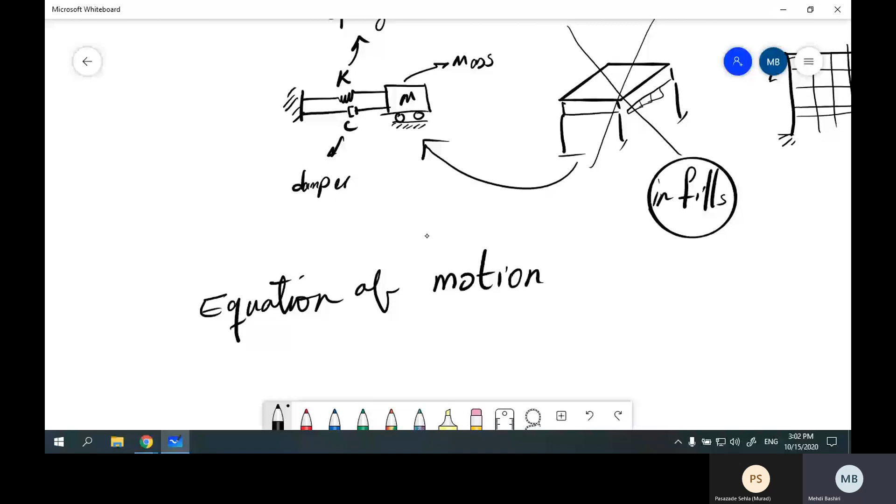For this system, M, if we have a force P in this way, for example, this is positive x, and this is negative x.

Okay, we have Fs. Sir, I don't know. Sir, you don't know? Your screen froze. I can't see anything. You can't see my screen? Yes.

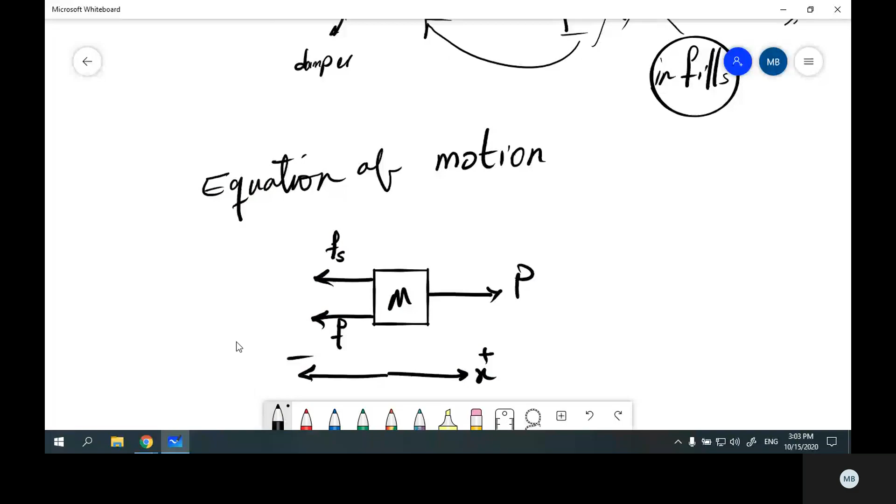Is it better now? Can you see the screen now? Okay.

So here we have three forces. One of them is P, one of them is Fs, the other one is for a damper, Fc or Fd.

If we want to find the response of the structure, what is the response? For example, you have a force here, earthquake force, and if I ask you to find the displacement of the structure after the earthquake, you have a displacement like this. If I ask you to find the response of the structure, you should find this displacement, or the velocity, or the acceleration. We categorize these items as the response of the structure.

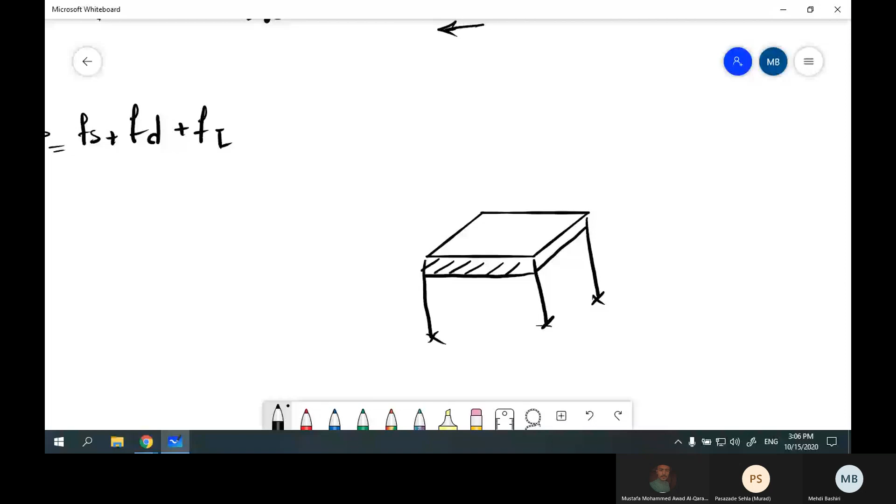This is the shaking of the ground because of the earthquake, and this is the weight, which we show with a lumped mass. So, because of the earthquake, this mass shakes, and the reason for this shaking is a force equal to m times Ag, the weight dot ground acceleration.

Because of this shaking, we have three things: one is displacement, one is velocity, and the other is acceleration. The force inside the damper triggers with velocity. This one, inertia, I think you know it from physics, triggers with acceleration, and this one triggers with displacement.

So if I push - assume that this is P - if I push this weight with a force P, this action has a couple of reactions, such as this one because of the stiffness, this one because of the damper, and one of them is Fi because of the inertia or the weight or the mass of M. And on the other side we have P.

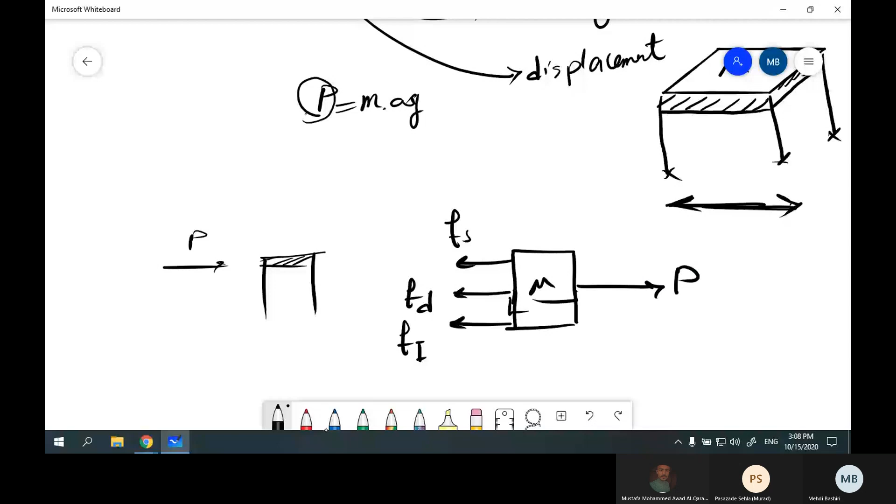So if we write the equation of motion, sigma Fx equals 0, we would have P on one side, and on this side Fs plus Fd plus Fi. What is Fs? Fs, as I talked about, is k dot x, like a spring.

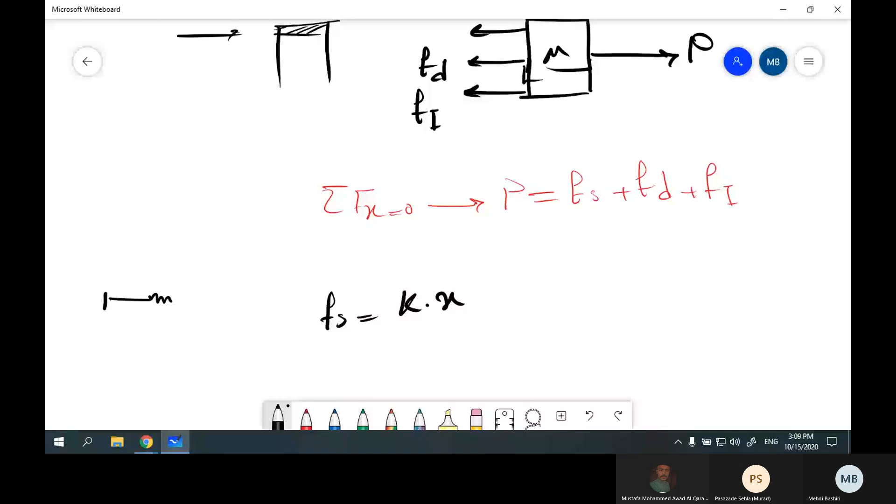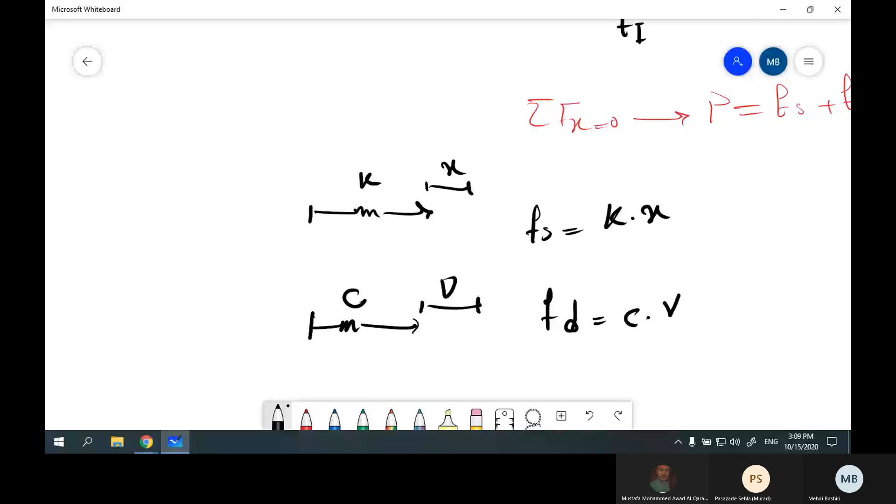The force inside the damper, with a coefficient of c, triggers with speed or velocity. Fd is equal to what? C dot v, or velocity. And because of the inertia, second law of Newton, Fi is equal to m dot a, acceleration.

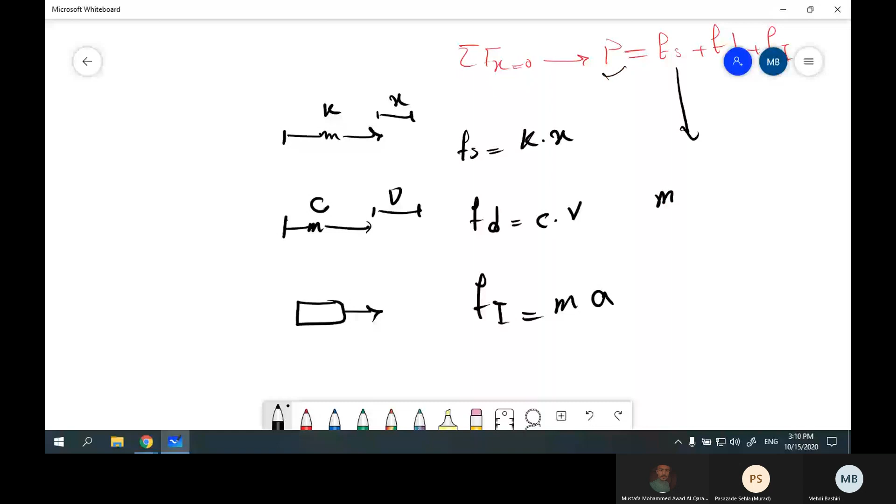So if I want to write this equation again, on one side we have m*a, on the other side we have Fs, which is K dot x plus C dot v plus m dot a. This is the coefficient of stiffness, this is the damping coefficient, and this one is the mass. So stiffness, damping, and mass.

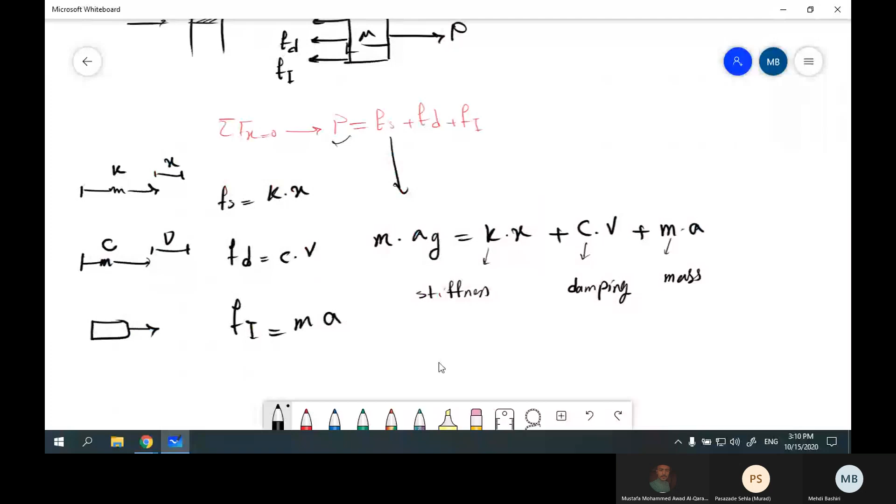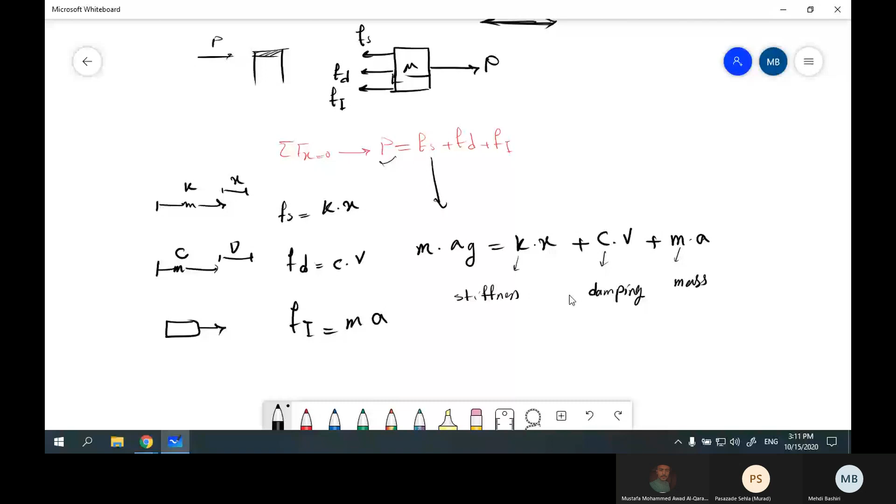I know this might be a little complicated because it's the first time that you hear this, but I just need you to know the general concept. I'm not going to give you examples of problems to solve using this. I just need you to know the general concept of equation of motion.

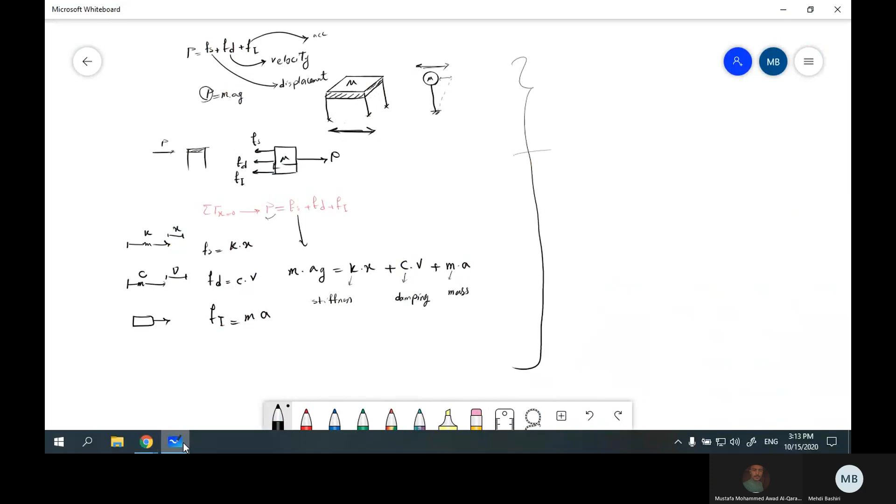Can you see it now? No. What now? No. Maybe you should leave and join again. Still low? Yes. Can you see or not? No, I can't see. Okay, leave and join again. Mustafa, can you see this screen? Yes sir, I can. Where are you? Your voice is very low. I said, where are you, in your country? I think I have a bad connection, that's why. Your voice is low. Where are you now? Now I can hear you. I am here, teacher. I said, in which country, your country? Yes, in my country. You're in Iraq? Yeah. What about you? I'm in my country. Charlotte, can you see it? Mustafa, mute your voice.

Can you see it now? Yes. Okay, as I said...

When we want to find the equation of motion, we have to use a free body diagram like this, and then by using... this is not zero, sorry. Sigma Fx is not zero here. I made a mistake. Sigma Fx is equal to p, not zero, because it's not static. And by using this equation, you can derive this one.

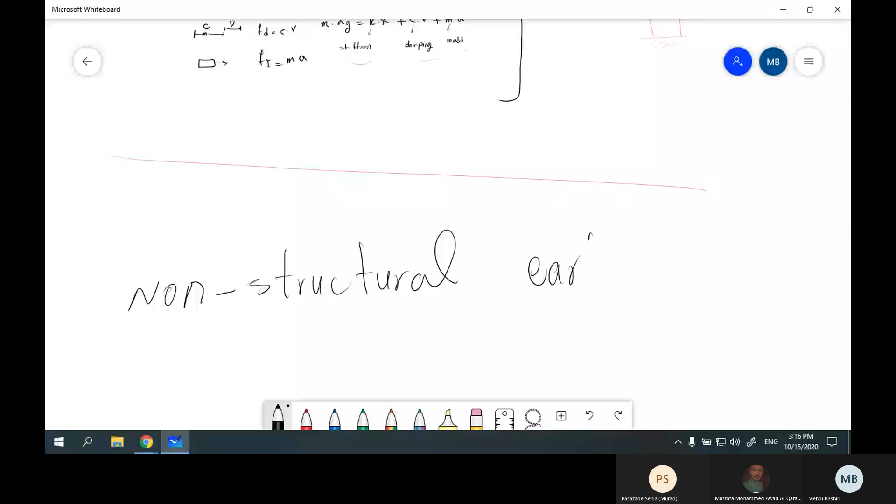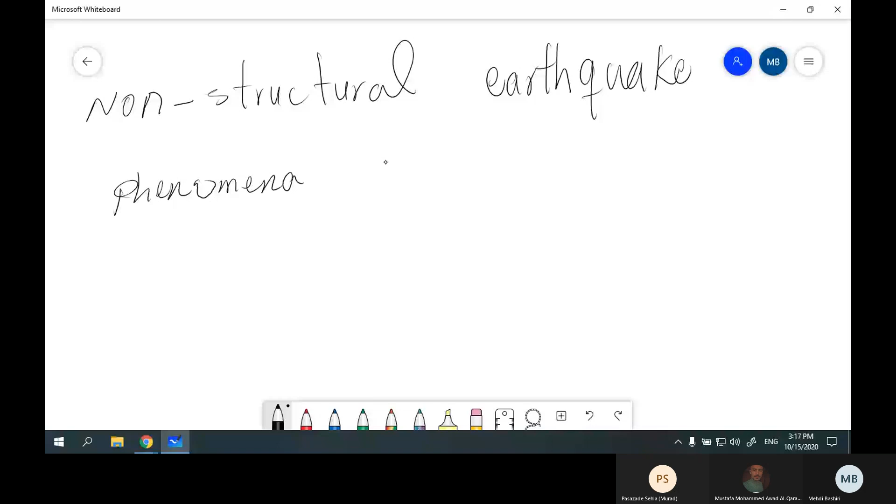One of the things about the earthquake is non-structural earthquake phenomena. What does it mean? If we have a structure like a building, when we investigate or evaluate this structure within the earthquake, we say that this is a structural investigation. For example, bridges, buildings, roads like this. But the ground, rivers, mountains, they are non-structural elements.

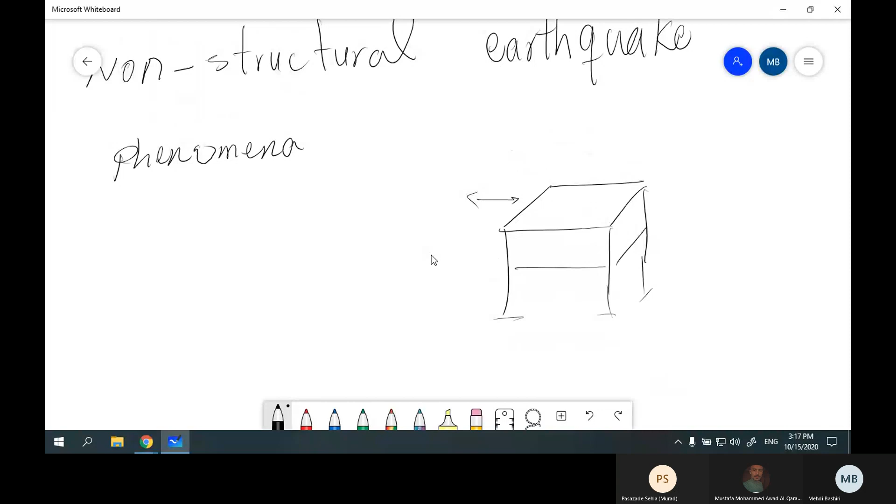So buildings and bridges, everything that we build, are structural elements. But such as rivers, or for example mountains - if you have a mountain here and we investigate this mountain after the earthquake, we say non-structural investigation. For example, after earthquakes we may have rocks falling because of the shaking, a couple of rocks fall down the mountain.

Or for example, because of the earthquake, the water inside the ground gets out, because of the pressures. So these are non-structural earthquake phenomena. In this chapter, we're going to talk about these non-structural phenomena. The first one is landslide.

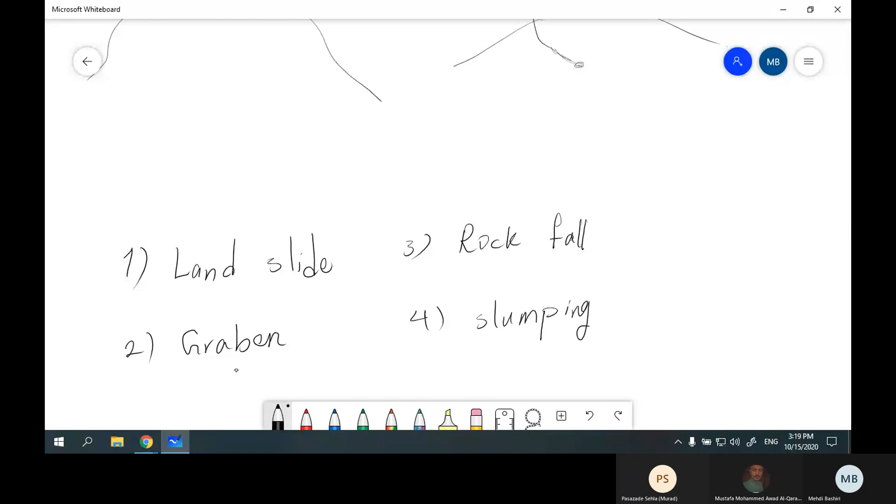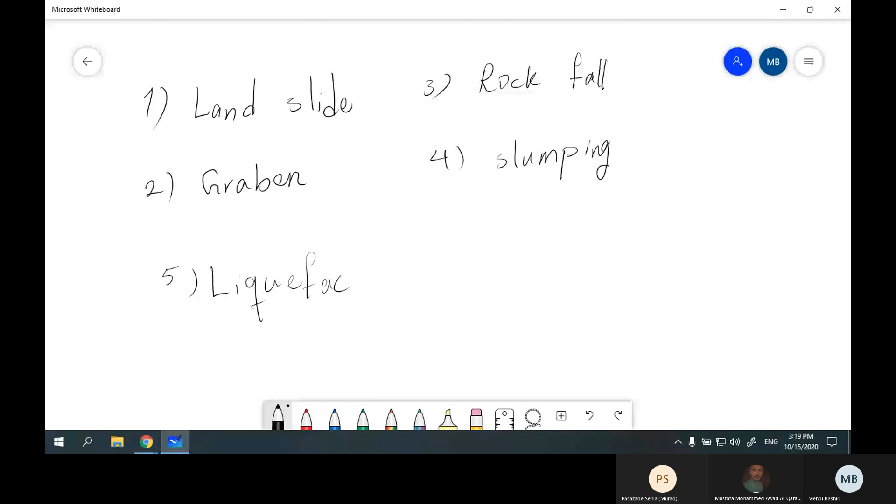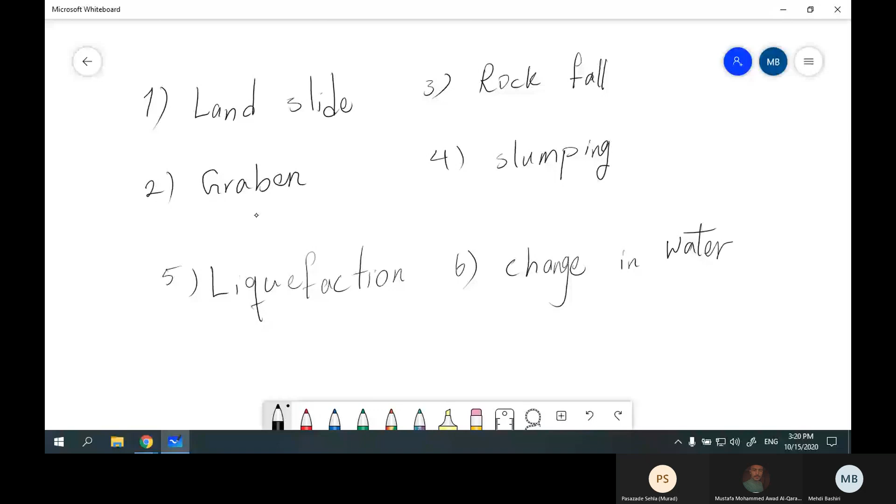The second one is graben. The third one is rockfall. Fourth one, slumping. Fifth one, liquefaction. Sixth one, change in water table. Seventh one, tsunami.

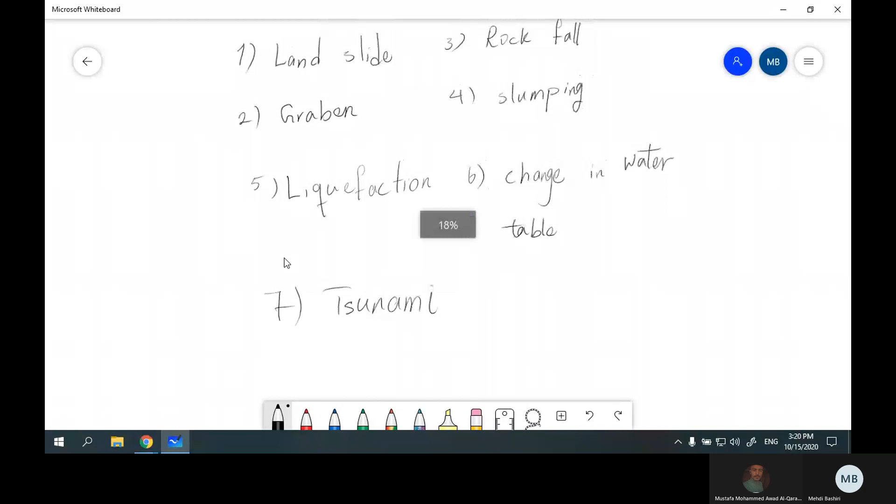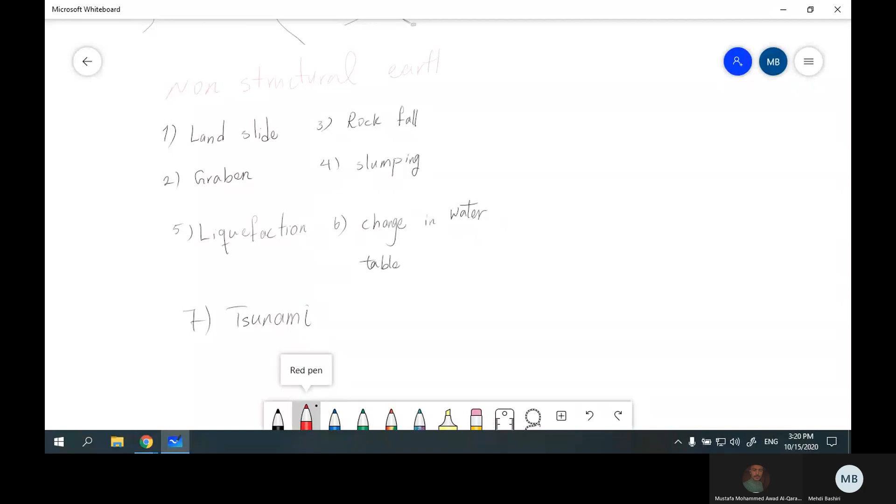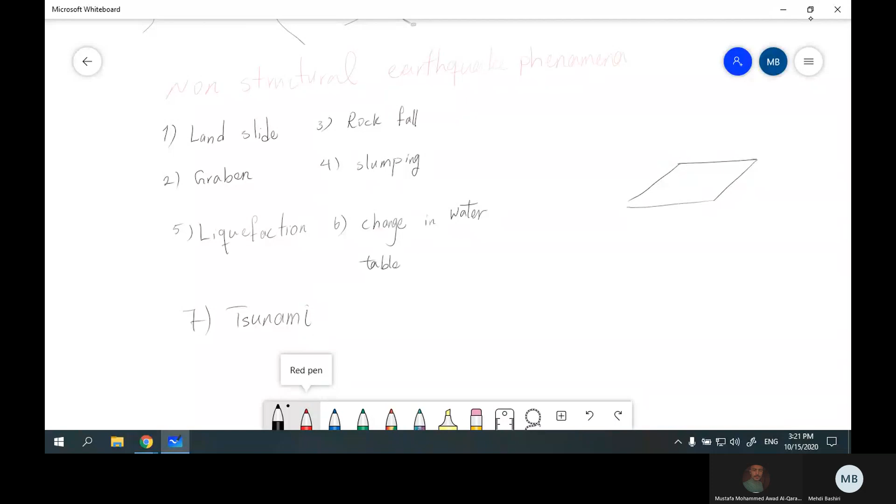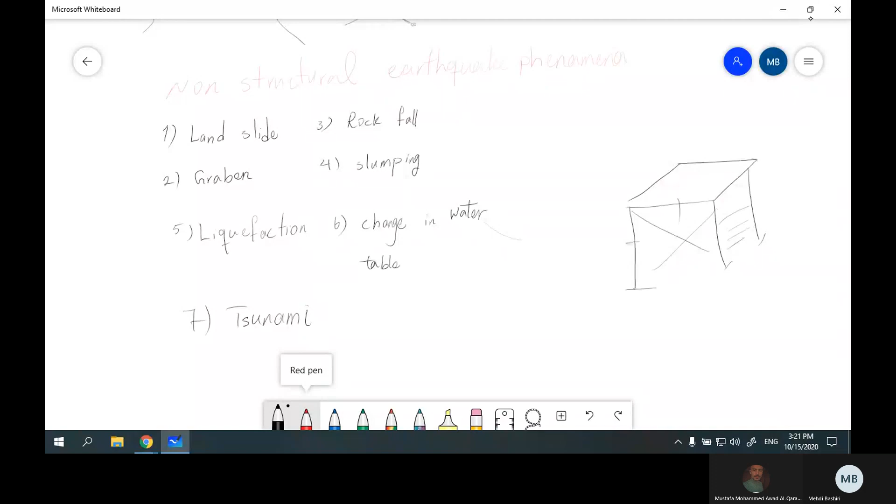Okay, so what are they again? They are non-structural earthquake phenomena. As I said, after the earthquake we may have a collapse or a failure in one of the columns, or in one of the beams, or in braces, or in walls - all of them are structural. But if we talk about the rivers, mountains, water tables, seas, oceans - all of them are non-structural.

Now I'm going to explain each of these phenomena. The first one is landslide.

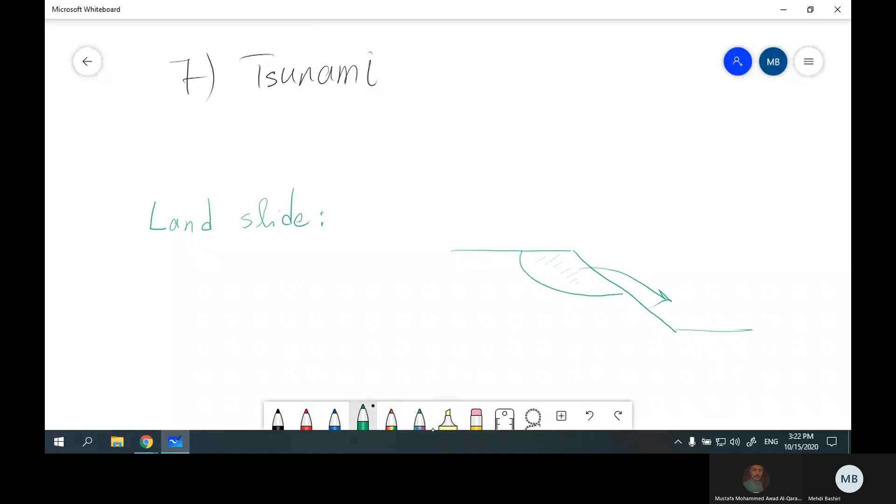In the landslide, a part of the ground, a part of the earth, slides down. For example, this one slides down, and after the earthquake, we have such a thing. We can say that before, for example, here we have a road, a street, whatever, and after that we have something like this. What are they? They are part of the ground - for example, soil, mud.

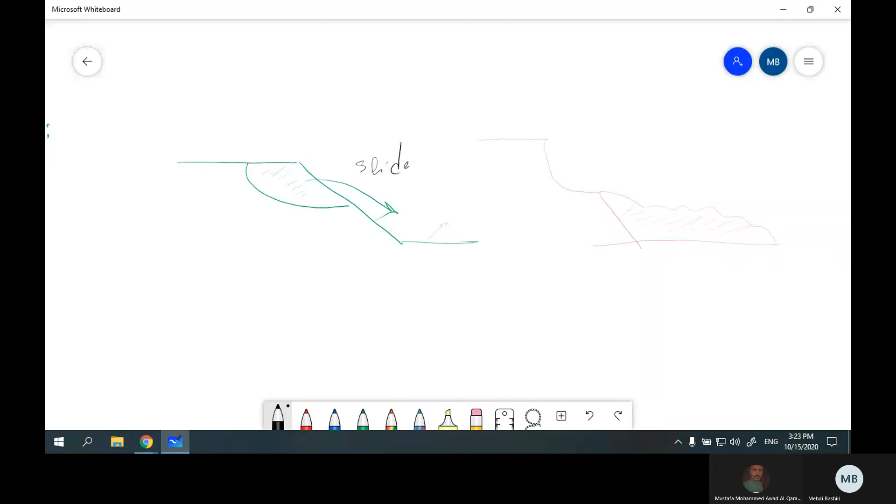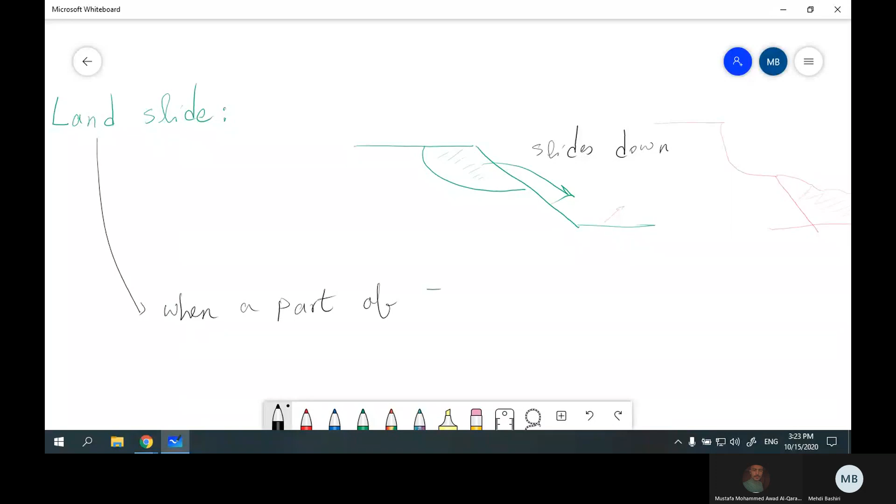So a part of the earth, a part of the ground, slides down. Why, for what reason? Mainly when we have water inside the soil. So let me write it down: landslide - when part of the ground slides down because of the earthquake.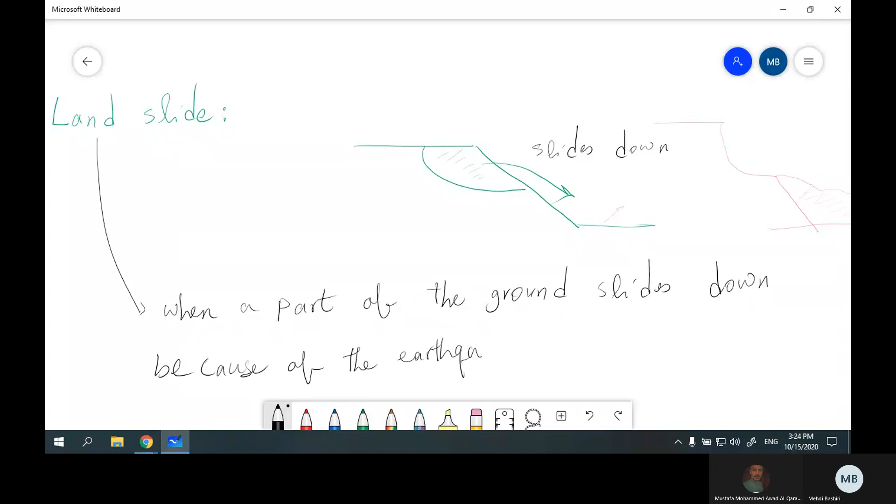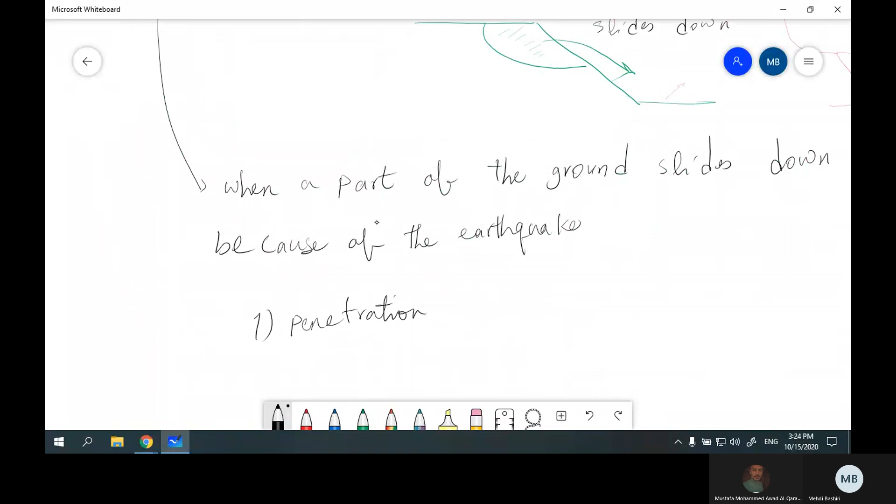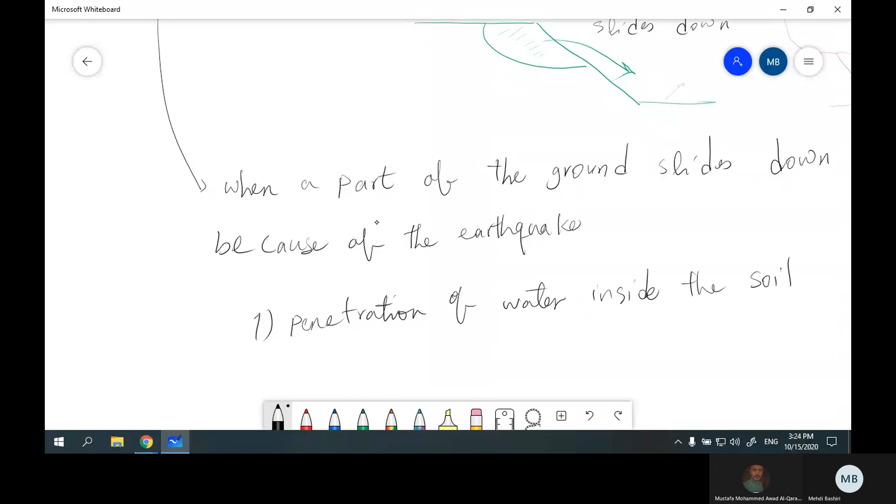Okay, and the main reason is water, or penetration of water inside the soil. It's obvious. For example, you all know that F is equal to ma. For example, in one case, we have this soil and this is dry, for example, with gamma of 16.

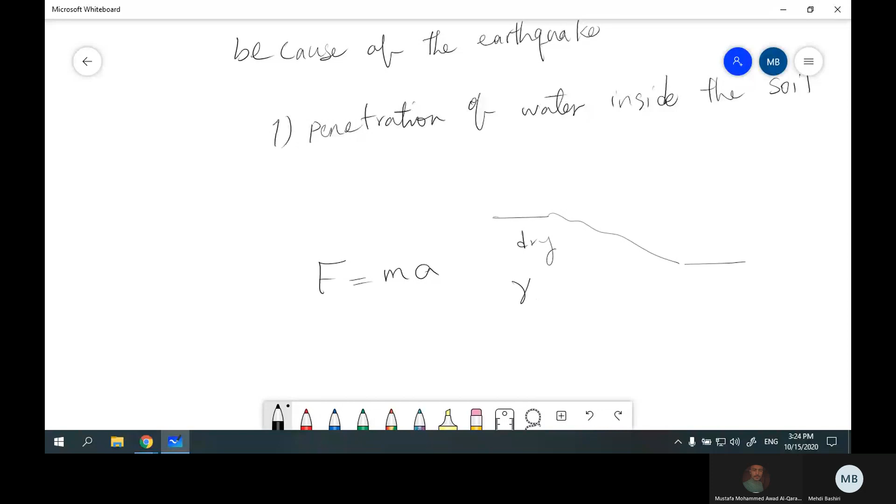In the second case, for example, here we have saturated soil. And if you check, you'll see that the saturated gamma is, for example, 22. Okay, so why? For example, here we have this soil, and after a heavy rain, the water penetrates inside the soil. The water drops penetrate inside the soil and increase the weight of the soil.

So in the first case, for example, we have the mass of M1. So here we have F1. A is constant, the earthquake is constant. And in the other case, we have M2. Because M2 is more than M1 because of the water effect, F2 is more than F1. So if we have a stable soil, but after a heavy rain with a small trigger such as an earthquake, this part, the heaviest part, because here we have less support than the other part, we'll have a landslide like this.

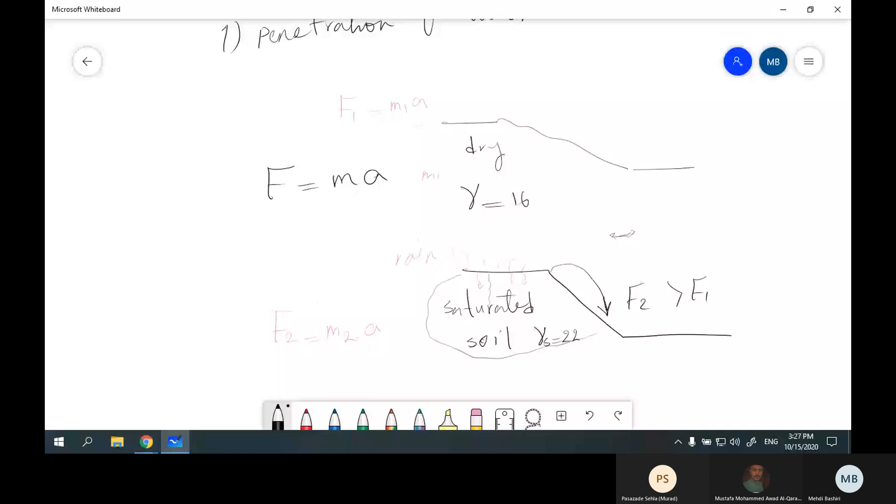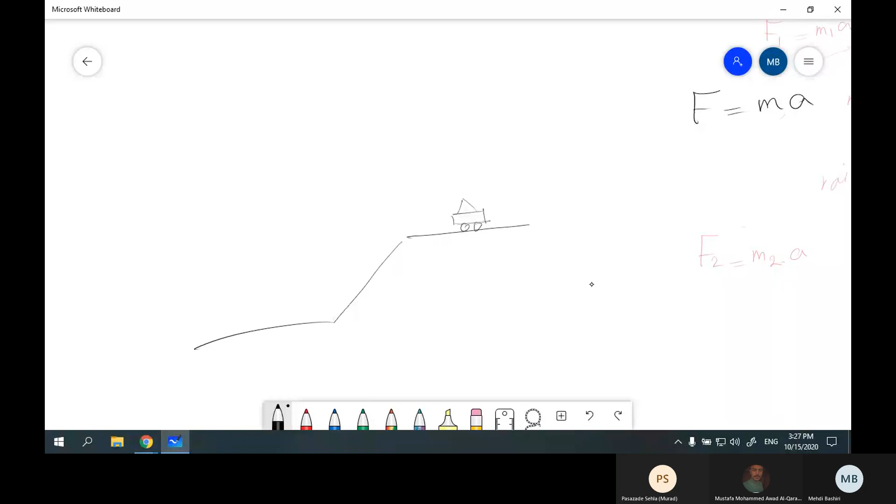For example, this is a road, and this is a slope. When you have cars or constructions, the movement of the cars creates small shaking. Sometimes you feel it when a heavy truck passes. You shake. So an earthquake is a shaking too. Sometimes we have natural shaking such as an earthquake, and sometimes artificial, such as a moving truck. In all the cases, the shaking triggers the water inside here.

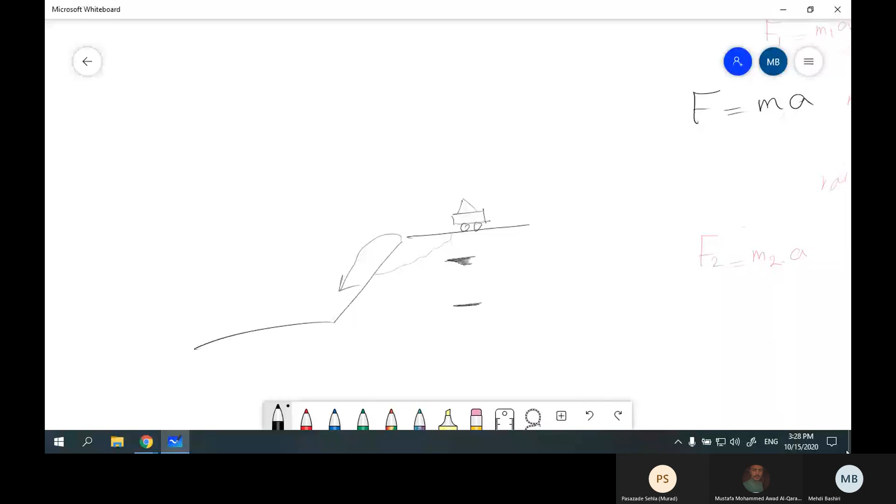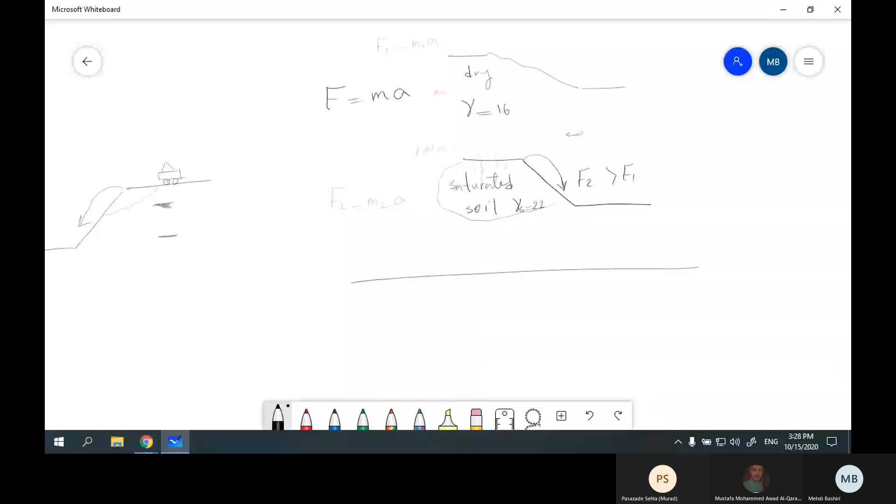Maybe in some cases it's not water. Sometimes it's a loose soil. But in most of the cases, we have water inside this soil. So we have a landslide. Okay, we call this landslide. Now I should tell you how to prevent landslides. To prevent or to avoid landsliding, A.

You can use a retaining wall. What is this retaining wall? For example, here you have a slope, a mountain, a hill, whatever, and here you have a road. If landslides happen here, you'll have a problem with this road. So you can use a retaining wall in the locations that are important for you.

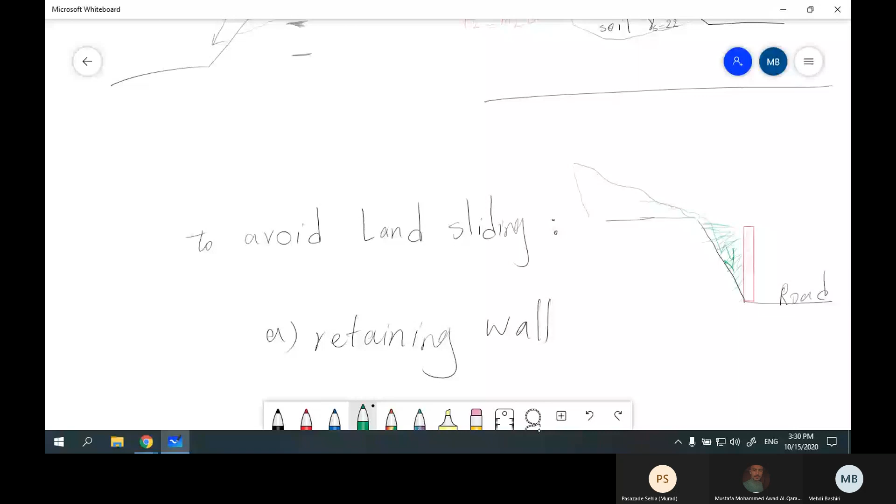What are retaining walls? For example, you just build a wall here, and if a landslide happens, the soil will be here. So you won't have any problem with the road. So the first method to avoid landsliding is a retaining wall. The second one is sheet piling.

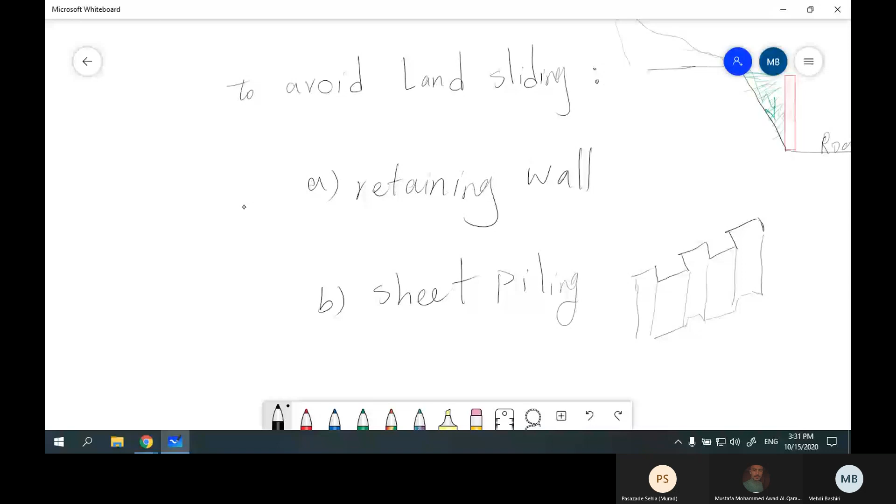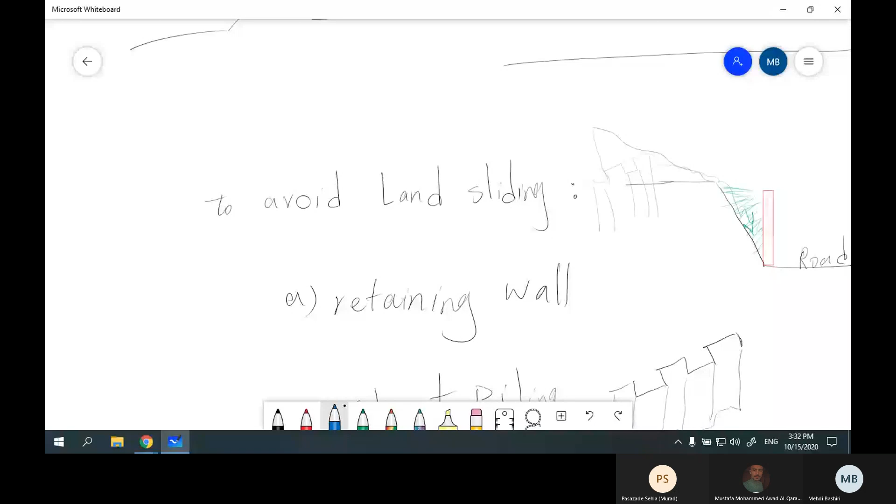We have some sheets like this. And if we put these sheets inside the loose part, we can prevent landsliding. How? For example, I know that in this part we have loose sand or loose soil. So I'll put these piles inside this ground so I can prevent landsliding. So the second method is to use sheet piles.

The third one is anchoring. For example, we have this type of soil here again, and I know that the soil here is loose, so I'm going to put some anchors like this. You know what an anchor is? We have, for example, nails, rods. We drill these rods, these nails, inside the soil so we can strengthen the soil here. Okay.

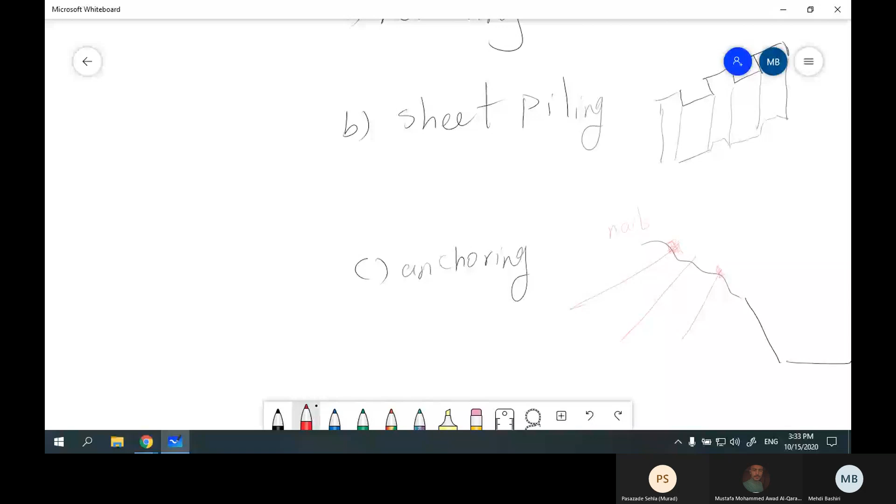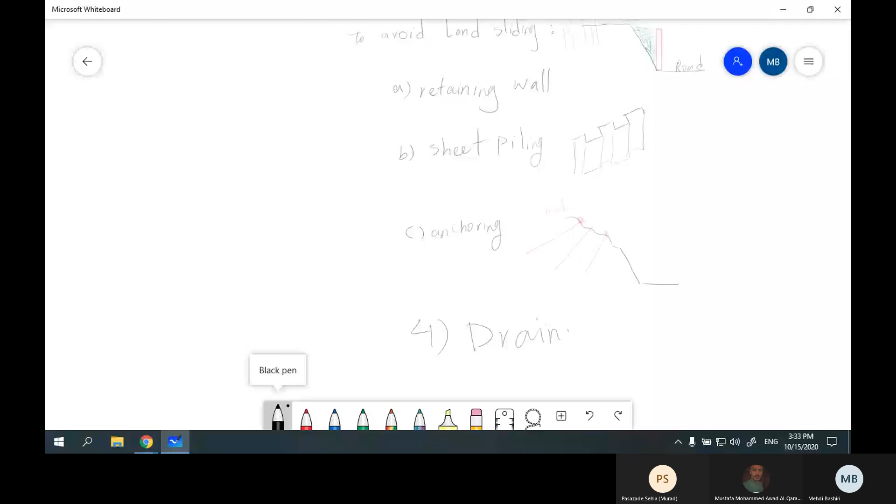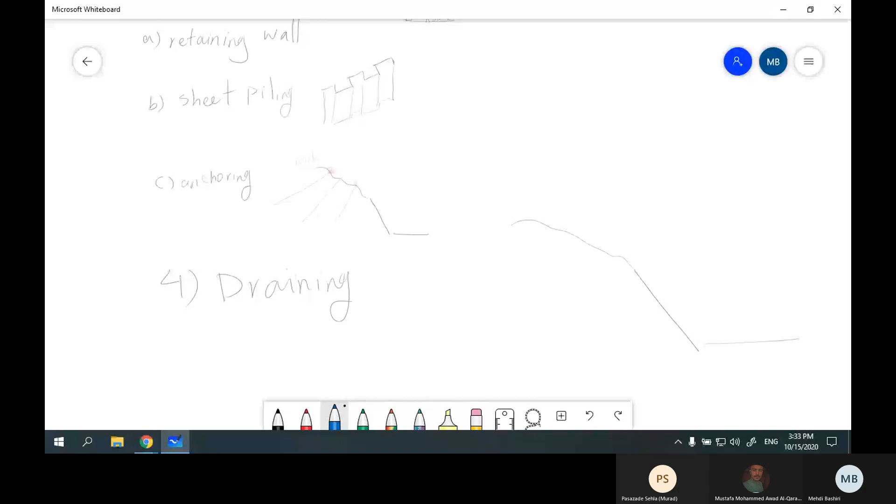The last method is draining. What is draining? As I said, for example, this is the soil, and because of the water inside the soil, the potential for landsliding increases. So if I want to reduce the risk of landsliding, the other method is to drain the water inside the soil. What does it mean? It means, for example, if I provide some pipes inside the soil, the water would drain and get out.

Small drains. For example, I think you saw the many drainage systems beside your streets. For example, this is the street. We have some places for passing water. This is a drainage system, and if we provide a reasonable slope along the street, the water would move to this drainage system.

Any problem? Any question about this part, landsliding? No. Okay, is it clear? Okay, so these are the ways to avoid landsliding. And the problems that happen because of landslides are obvious. Okay.

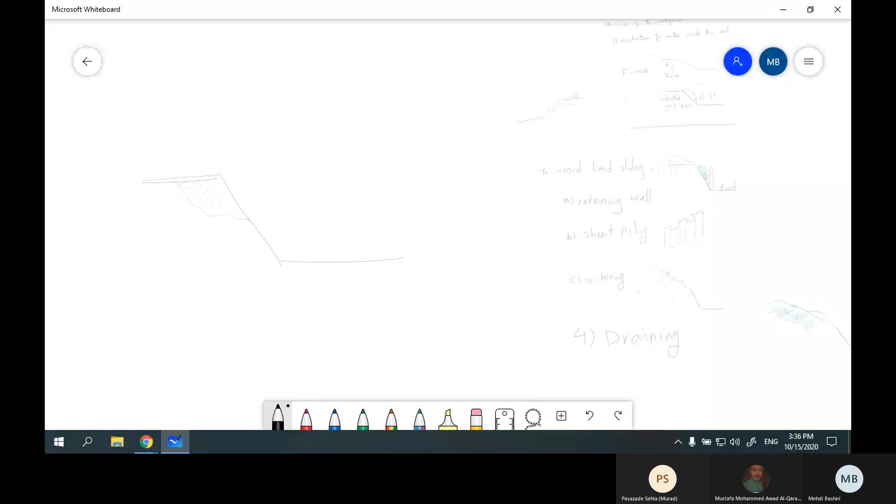For example, if we have a landslide here, the main problem with this landslide is that we would have many failures in this part, downstream. For example, sometimes we may have a village here. Sometimes we may have a road. So because of this landslide, all of them would disappear.

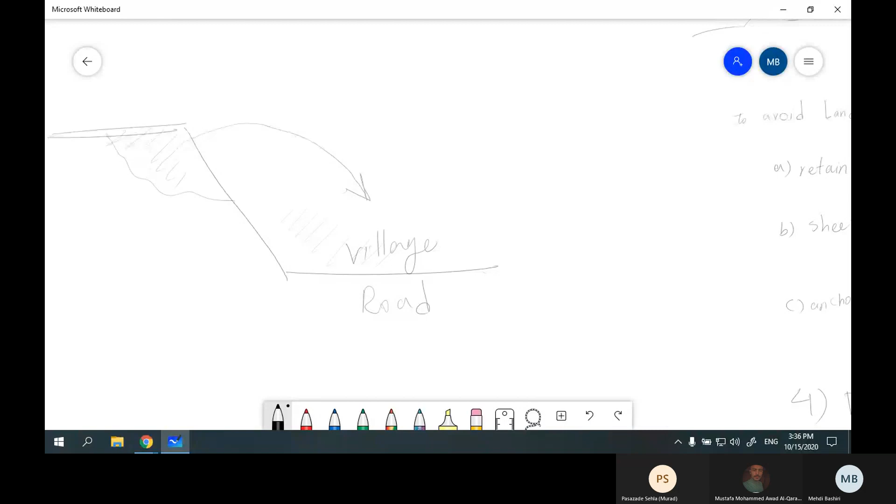Okay, the second one is graben. What is graben? For example, you have earth. This is your ground surface, and because of the earthquake, you may have a wedge like this. So this is the ground surface before the earthquake, and this is the ground surface after the earthquake.

We have failure surfaces here, and the reason for this failure is earthquake.

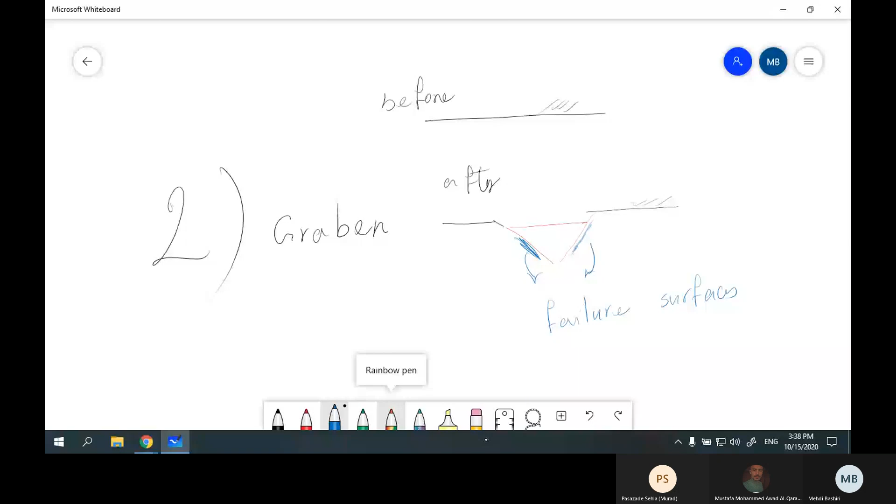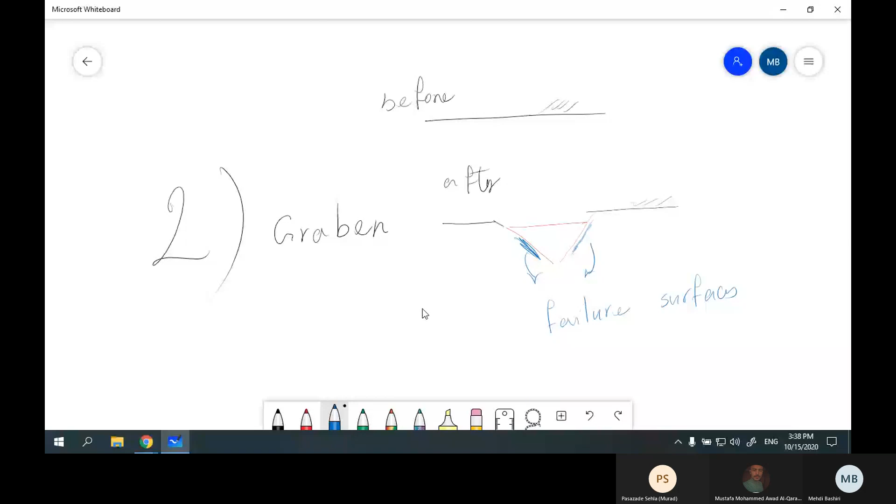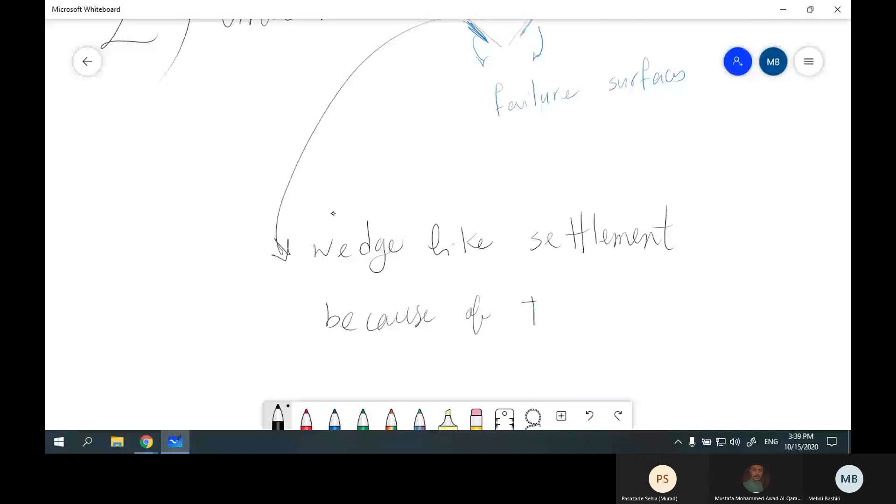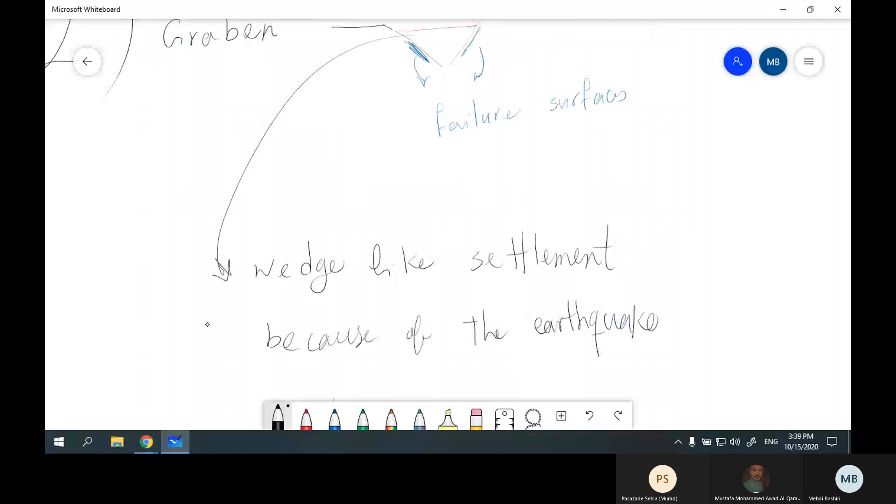But the thing about this type of failure is the shape of this settlement. Here we have a specific type of settlement. This shape would be like a wedge. So whenever you have a wedge-like settlement because of the earthquake, we call it graben. Again, we have a settlement with the shape of a wedge.

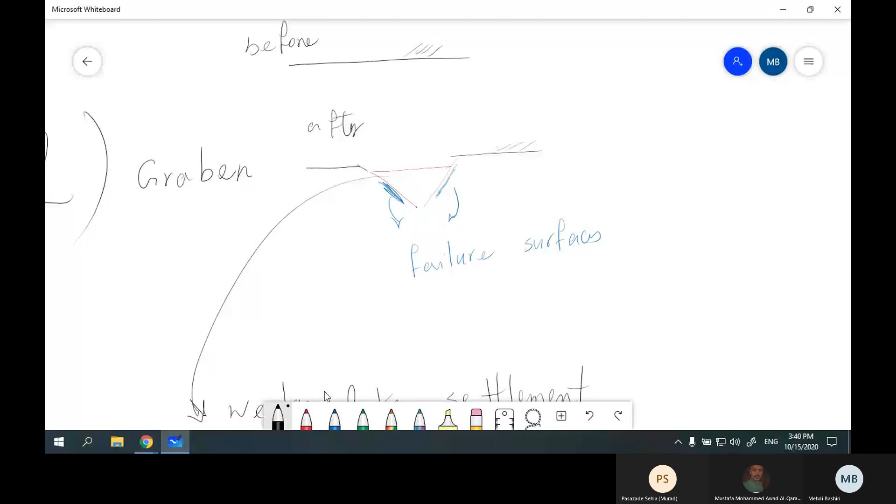So what's gonna happen after? Let me write again. For example, this is the ground, and this is the settlement. So what's gonna happen after this event? If, before the earthquake, this was the ground, and we had a building here, after the earthquake the building would be like this, and this is a failure.

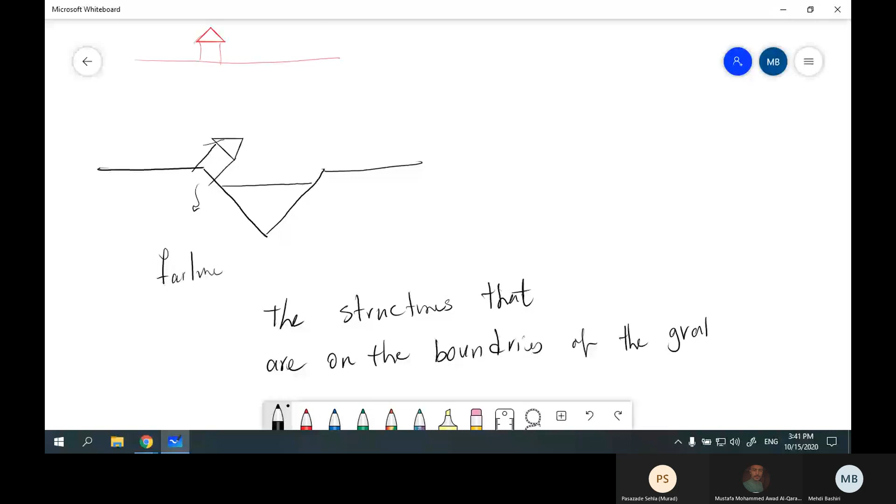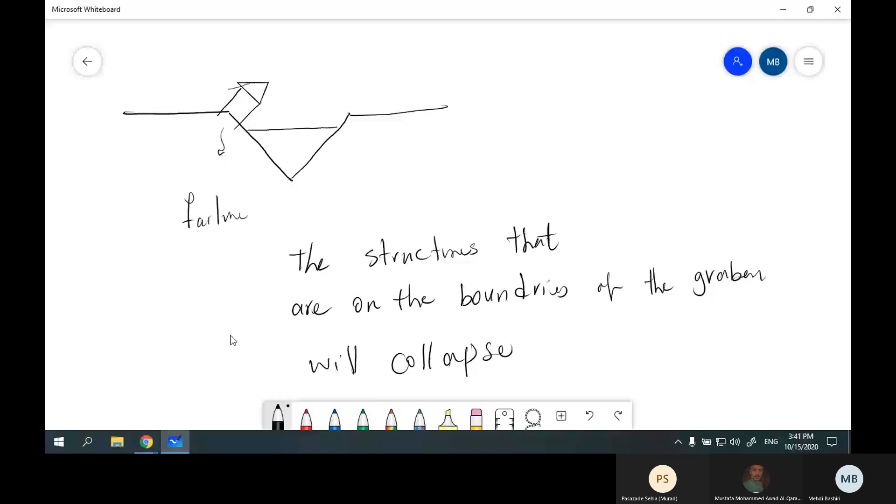So the main problem is that the structures that are on the boundaries of graben will collapse like this. For example, you may have buildings, you may have bridges, you may have pipes. This is the main problem, pipes, pipelines.

For example, oil pipes, sometimes their length is more than 10 kilometers, 100 kilometers. So you have a pipeline system, water, oil, sewer, and because they're inside the ground, because of this settlement, you may have failure like this, and you have many problems after this.

For example, you have the seepage of water, sewer. Sometimes they are toxic materials. Sometimes they are dangerous. Sometimes they are flammable. And sometimes this is the only pipe for transmitting water, so the water of a village will face problems. So the main problem is with the structures that are in here.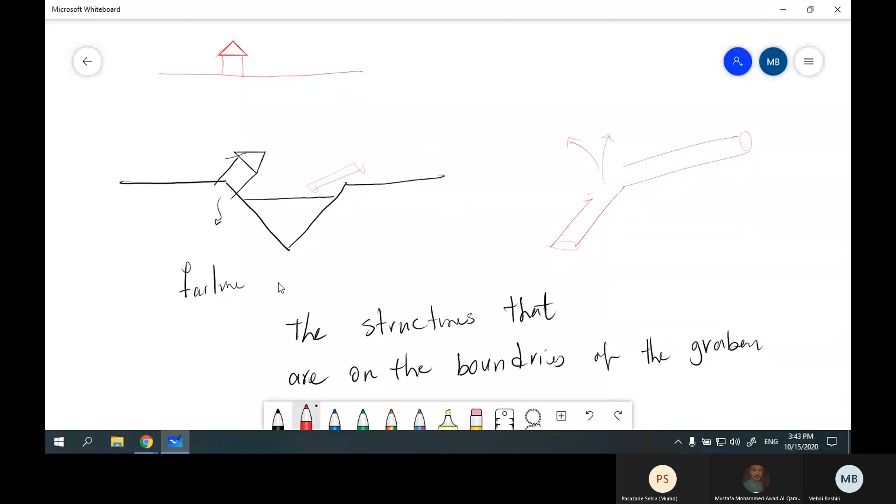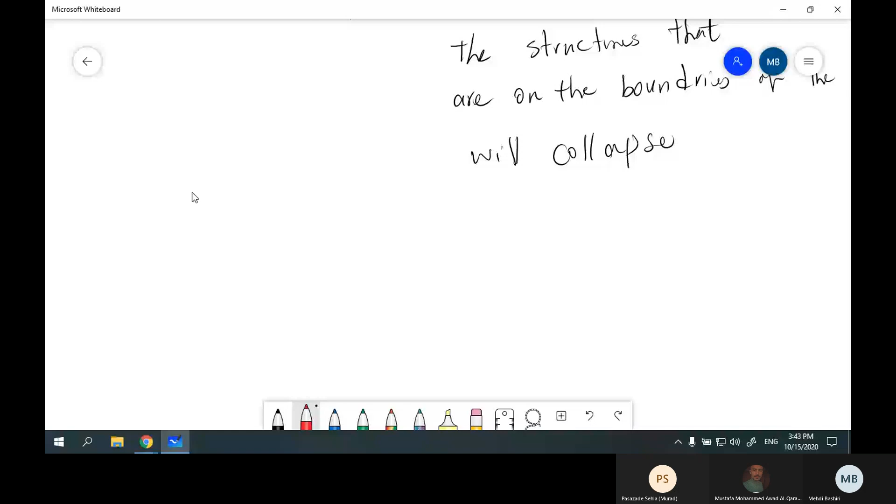And it is obvious we can't control this phenomenon from happening. In some cases we can compact the soil here, but in most of the cases we can't do any effective thing here.

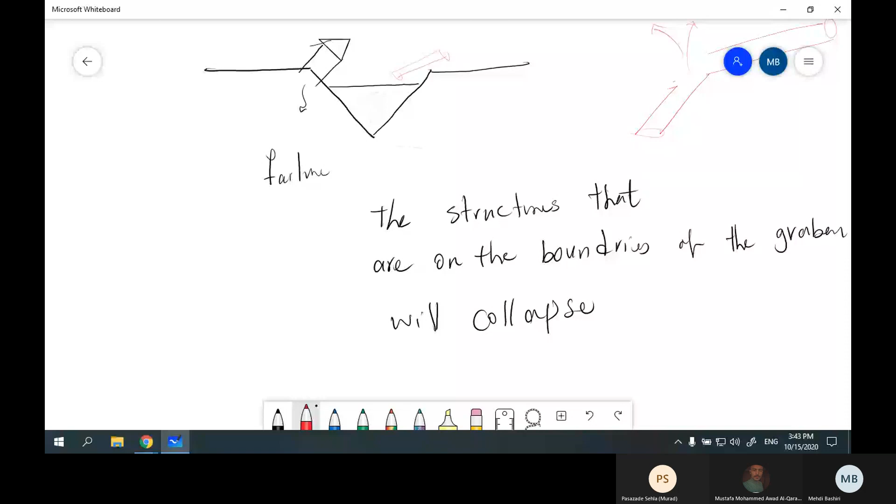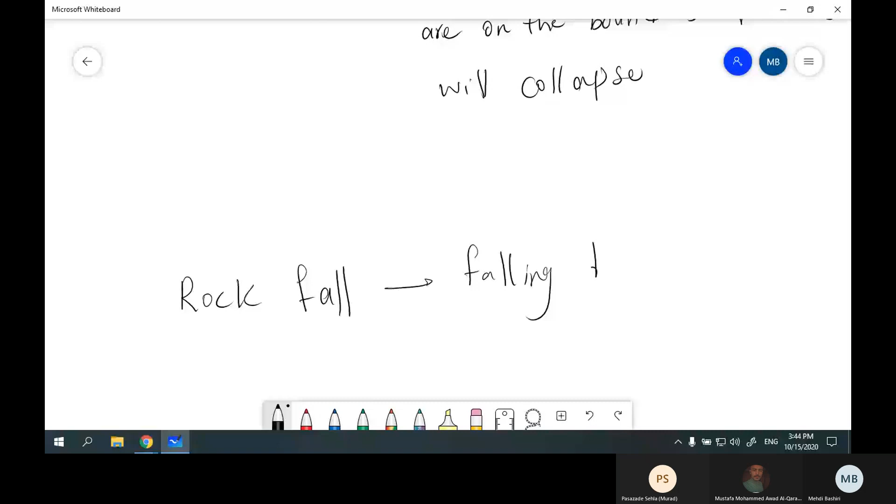The third one is rock falling: falling down of rock pieces from mountains or hills. It is obvious.

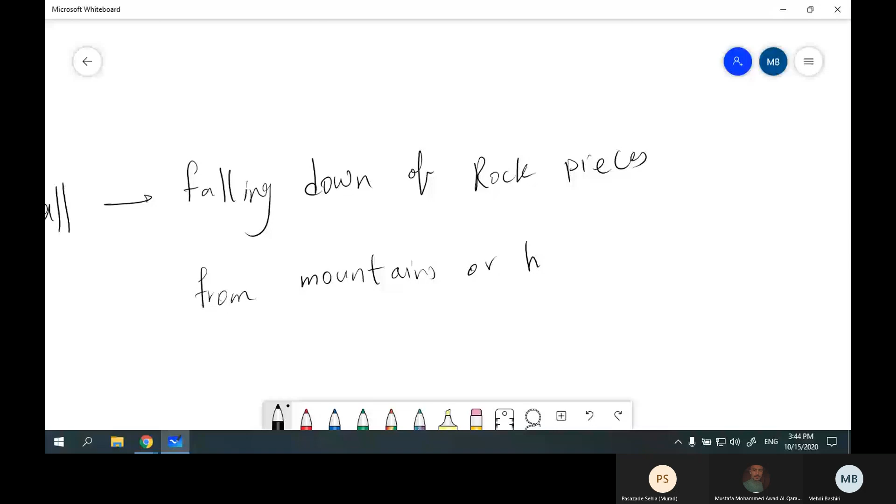For example, we have a mountain, and because of the shakings, we may have small cracks, and because of freezing and heating, we may have cracks inside the rocks, and then by shaking, these parts may fall down. So we call this rock fall. And it's obvious that we may have problems with the parts that are down the road. Sometimes we have a building here, sometimes we have a road. Cars, trucks are in danger because of this phenomenon.

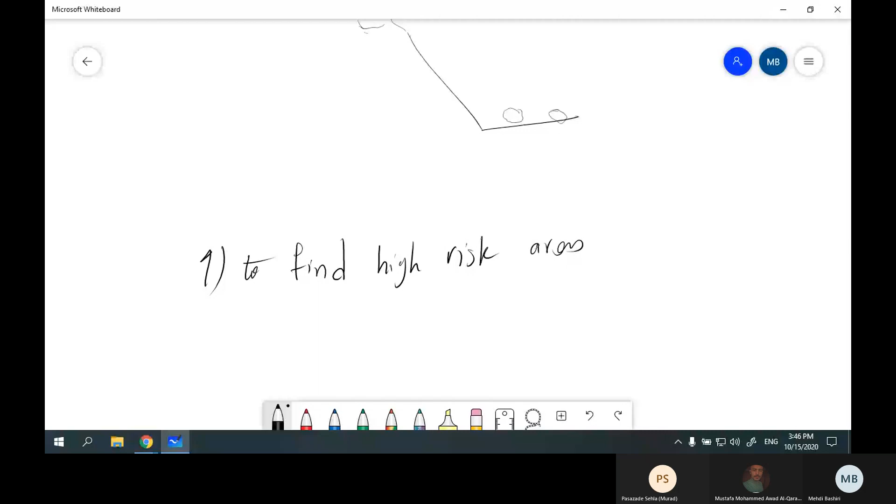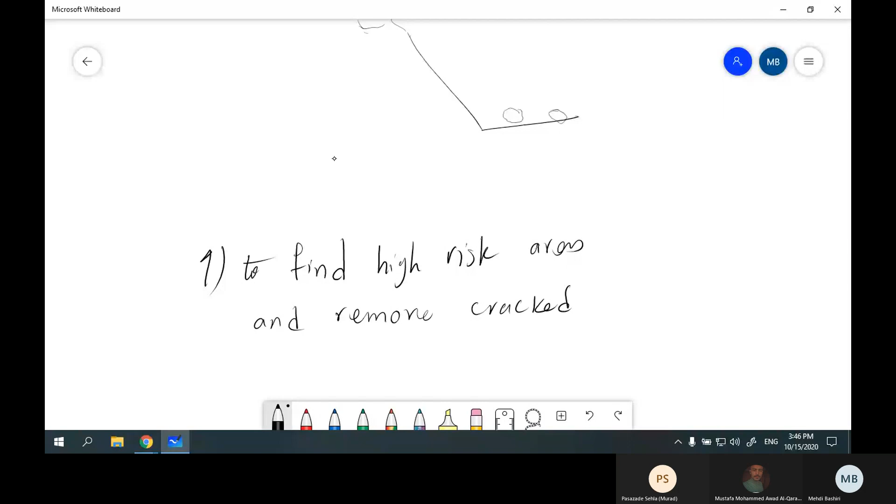Okay, we have a couple of methods to prevent rock falling. The first one is to find high risk areas and remove cracked rocks by our own.

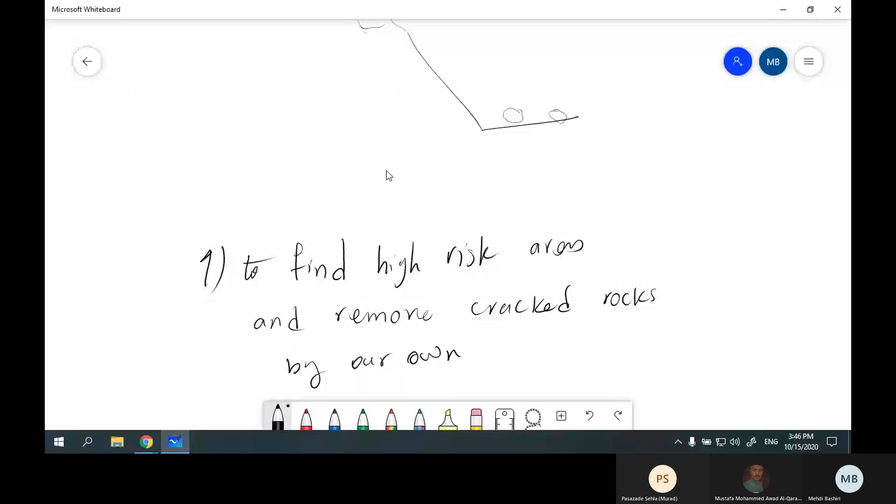What does it mean? For example, you can find the places that have the potential for rock falling, and then remove this, for example, by hammer, and secure the place. So then the risk of rock falling reduces.

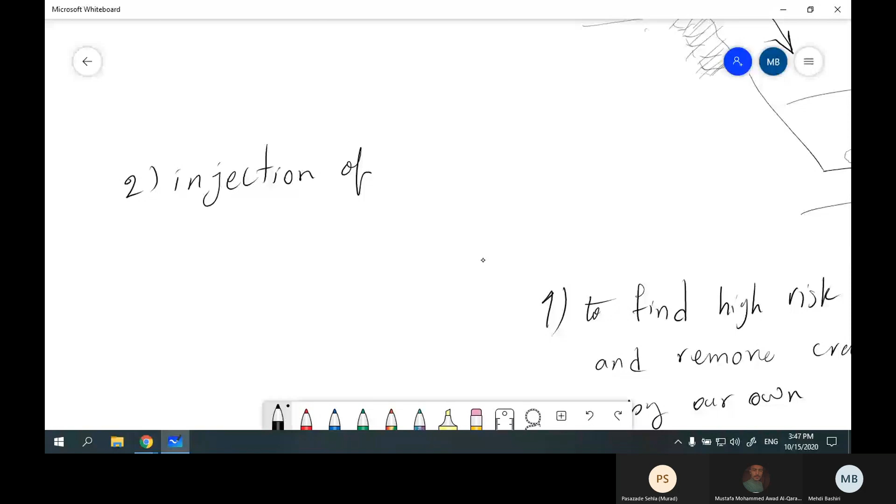The second one is injection, like strengthening the rock by injecting paste.

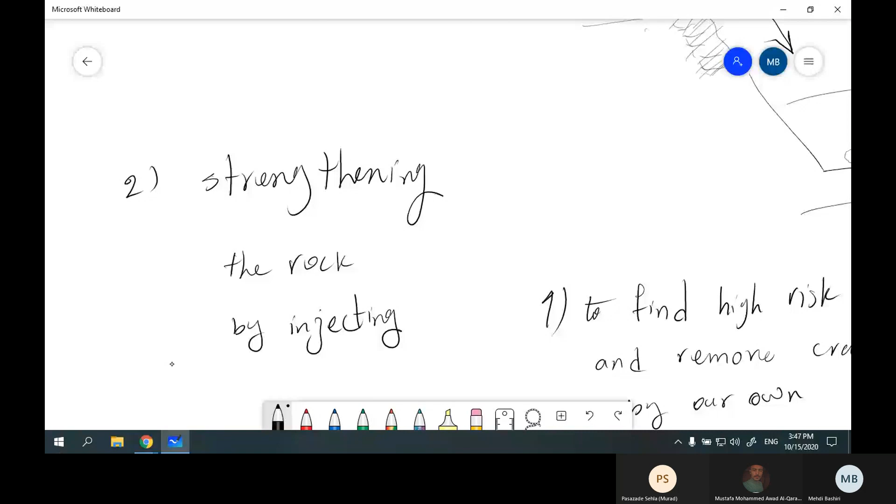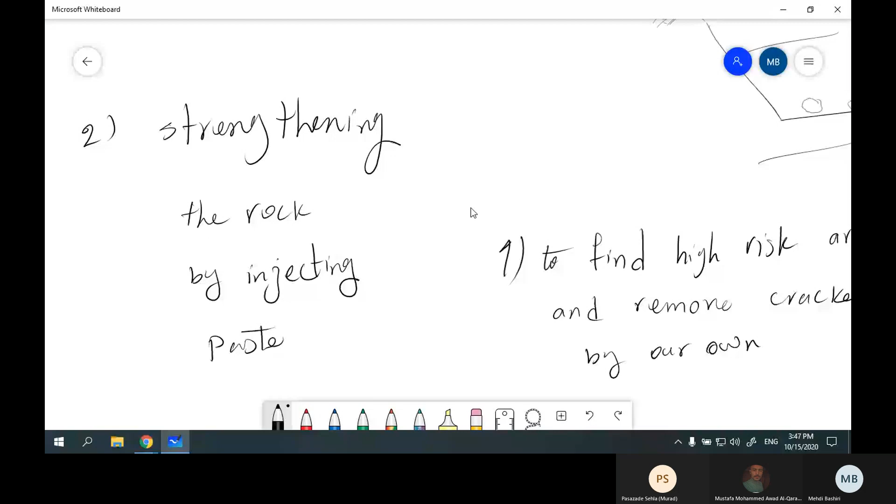What does it mean? It's something like glue. For example, you know that this area has a potential for rock falling. So you can inject grout, for example. You can inject cement paste. You can inject a couple of materials so you can strengthen these rocks.

The other method that I explained for landsliding, if you remember, I told you anchorage. The third one is using anchors, so you can tie the rock with anchors.